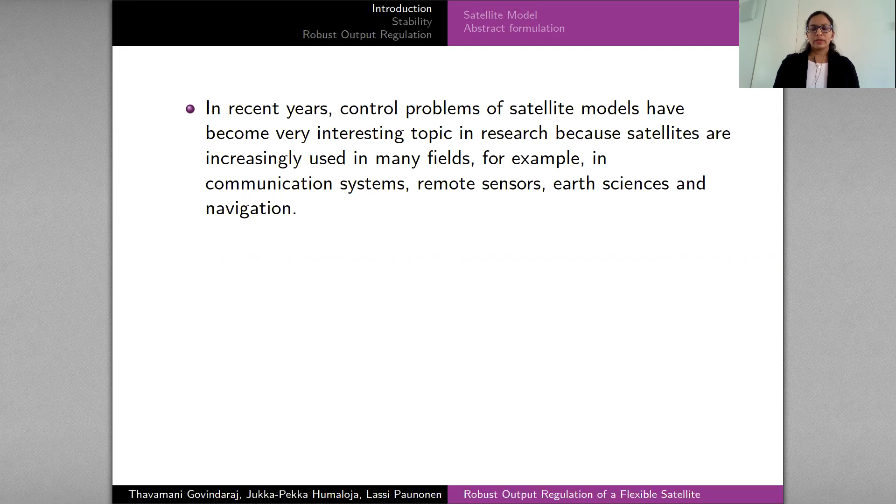There are a number of satellites modeled as two symmetrical flexible solar panels attached to a central rigid body. However, the flexibility of those panels affects the model dynamics, such as shape deformation, which leads to challenges in controlling those kinds of models.

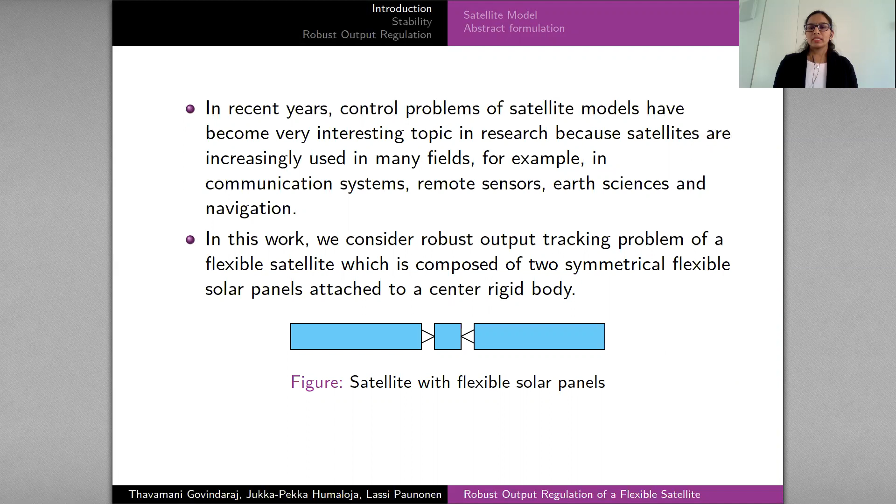In this work, we consider the robust output tracking problem of a flexible satellite, which is composed of two symmetrical flexible solar panels attached to a central rigid body. Our goal is to construct a controller in such a way that the output of the satellite model converges to a given reference signal despite perturbations, uncertainties, and disturbances in the system.

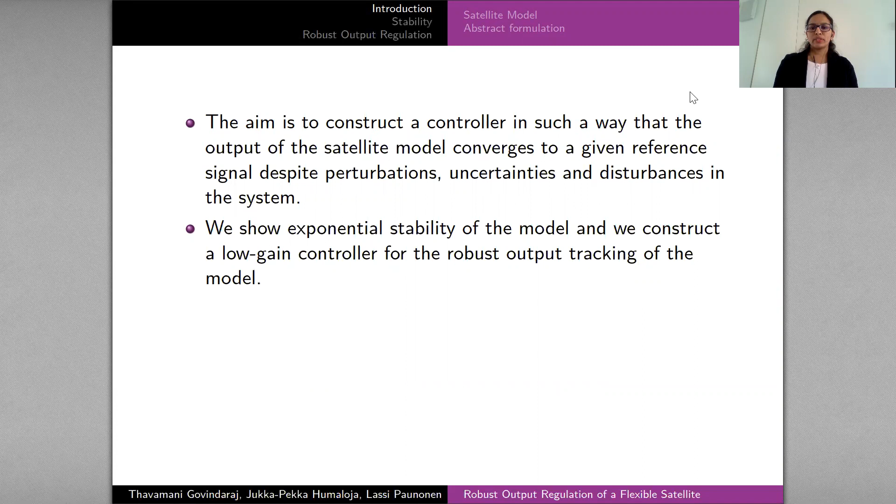We show the exponential stability of the model, and we construct a low-gain controller for the robust output tracking of the model. The main novelty of this work is that we use the Port-Hamiltonian framework, and we show a power-preserving interconnection between the panels and the central rigid body.

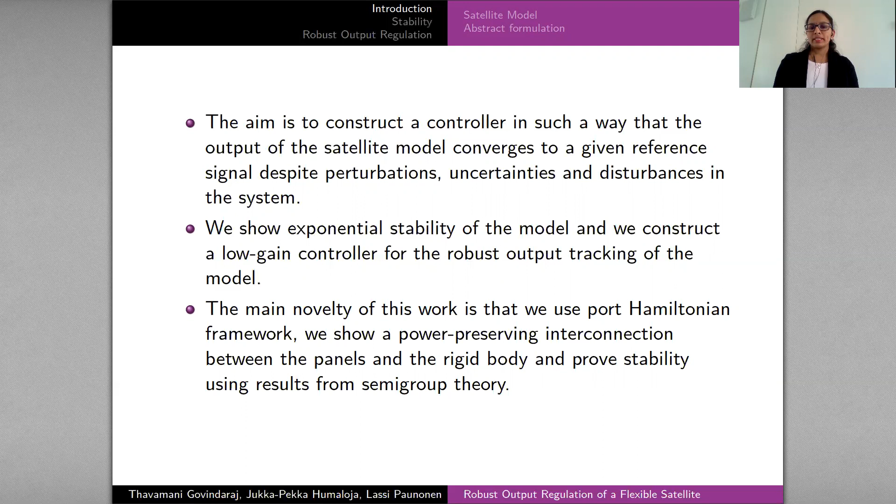We use the Port-Hamiltonian framework because Port-Hamiltonian systems have several nice properties, such that several interconnected Port-Hamiltonian systems via standard feedback interconnection is again a Port-Hamiltonian system, and the stability analysis of these kinds of systems becomes easier. For this stability analysis, we use results from semigroup theory.

So this is our model. We consider a dynamic model of a satellite composed of two symmetrical flexible solar panels and a central rigid body. This kind of model has been considered in Bontsema et al. and He and Ge. Here the solar panels are modeled as Euler-Bernoulli beams.

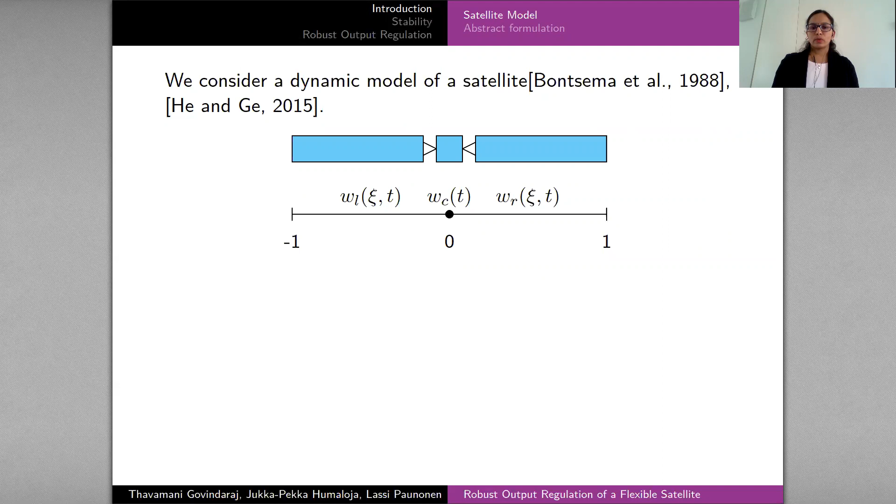In our model, we take the panels to be of length 1, so therefore the governing equations of motion are given by these equations. Here, WL, WR, and WC are the displacements of the left beam, right beam, and the central rigid body respectively. In these equations, E is the Young's modulus of elasticity, I is the second moment of area of cross section, rho is mass density, A is cross sectional area, and gamma is the viscous damping coefficient.

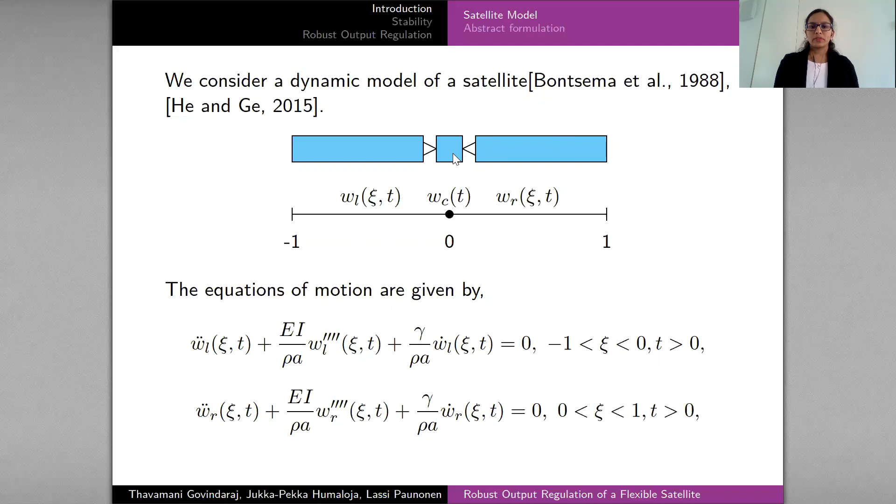For the boundary conditions, here we could see one of the ends of the beams is free, so therefore the shear force and the bending moment of the beams at these ends are 0, and the other ends are attached to the central rigid body, so therefore the boundary conditions are given by these equations.

Here these first two equations are for the rigid body. Here M and Im are the mass and mass moment of inertia of the central rigid body. These two equations are for the free ends, and at the center the linear and angular velocities of the left and right beams are equal, and they are equal to the linear and angular velocities of the central rigid body.

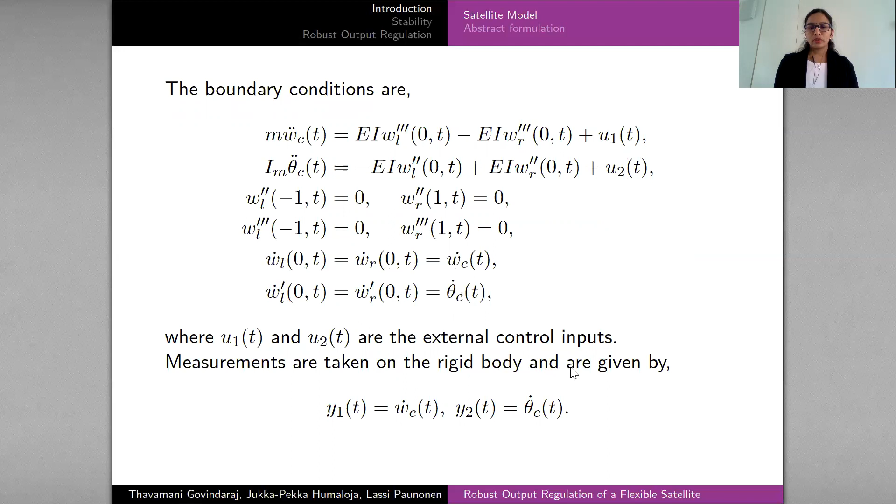Here U1 of t, U2 of t are the external control inputs which act on the rigid body. The measurements are taken on the rigid body and are given by the linear and angular velocities of the rigid body. So what is our goal? Our goal is to construct a controller in such a way that the outputs of the satellite model, that is the linear and angular velocities of the central rigid body, converge to given reference signals.

This means that the tracking error, which is the norm of the difference between the output of the satellite model and the reference signal, converges to zero asymptotically. And the controller is robust, meaning it is able to tolerate the disturbances, perturbations, and uncertainties in the system.

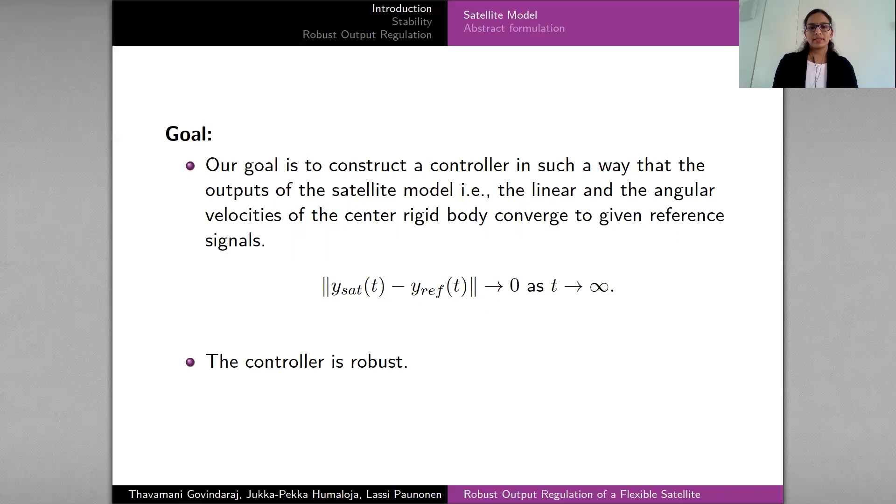As the first step, we formulate our satellite model in the abstract form. We can see the satellite model is indeed a coupled system of the beams and the central rigid body, where the beams interact with the rigid body through the boundary interconnection. So therefore, in our formulation, we separate the beam systems and the rigid body from the satellite model, and then we formulate the subsystems in the abstract form, and finally we couple the subsystems through the boundary interconnection.

We write the beam systems as boundary controlled Port Hamiltonian systems of order 2. First, we separate the left beam system from the satellite model. Since we are in the Port Hamiltonian framework, the state variables or energy variables are given by these terms, and therefore the left beam equation can be written by this equation.

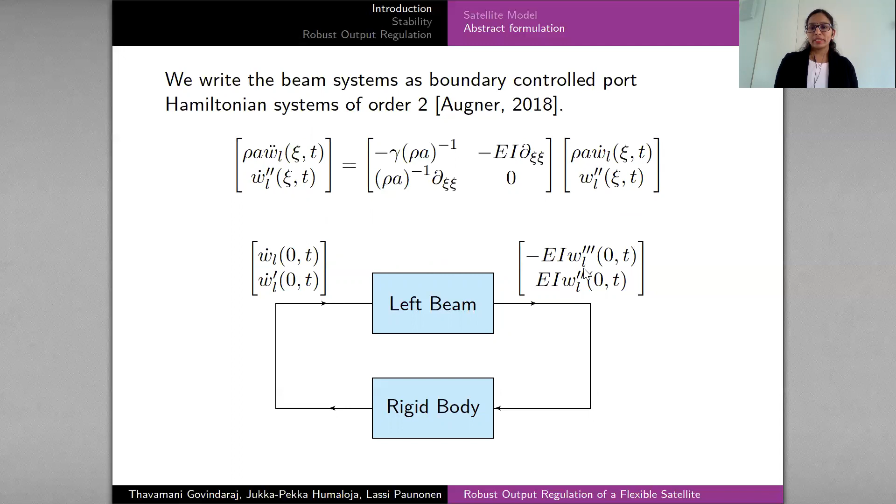For the boundary conditions, one end of the left beam is free and the other end is attached to the rigid body. At that end, the left beam has boundary inputs and boundary outputs given by these terms. That is, the boundary inputs are the velocity and angular velocities at the center, and the outputs are the shear force and bending moment at the center.

Similarly, for the right beam, we can write the right beam equation using the energy state variables given by these terms. One end of the right beam is free and at the other end it is attached to the rigid body. At that end, the right beam has boundary input and boundary output given by these terms.

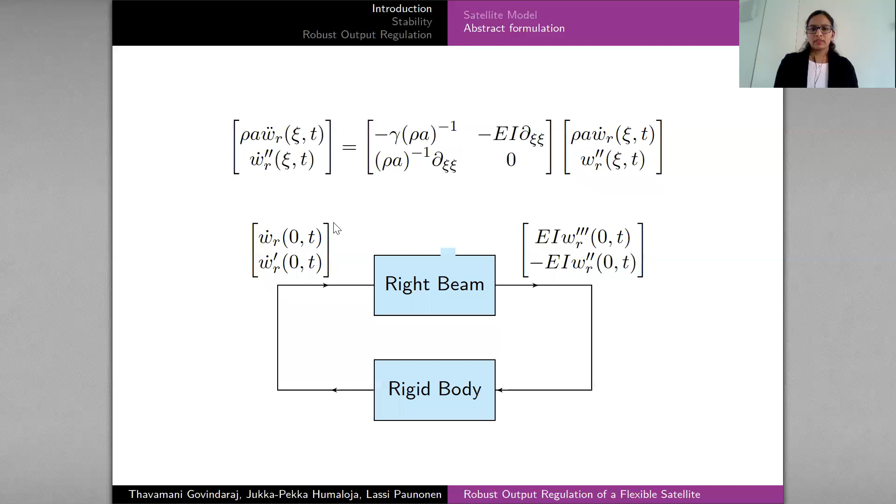Now we combine the two beam systems into a single system such that the input of the combined beam system is the average of inputs of the left and right beams, and the output of the combined beam system is the addition of the outputs of the left and right beams.

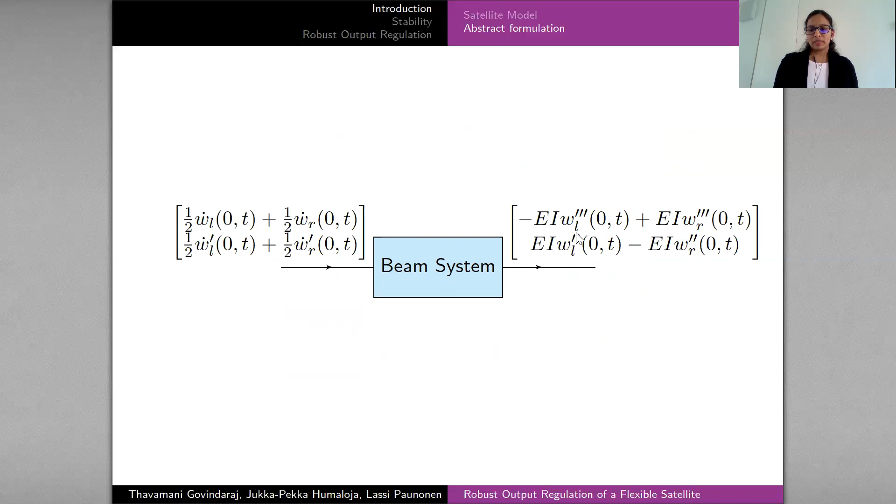Next, we separate the rigid body from the satellite model, and the rigid body equations are given by these equations. From these equations, we could see the rigid body actually doesn't have its own dynamics. These terms are from the beam system.

Therefore, the rigid body has inputs given by these terms, and we can measure the velocity and angular velocities from the rigid body. So the inputs and outputs of the rigid body are given by these terms, and we can write the rigid body in an abstract formulation using these inputs and outputs.

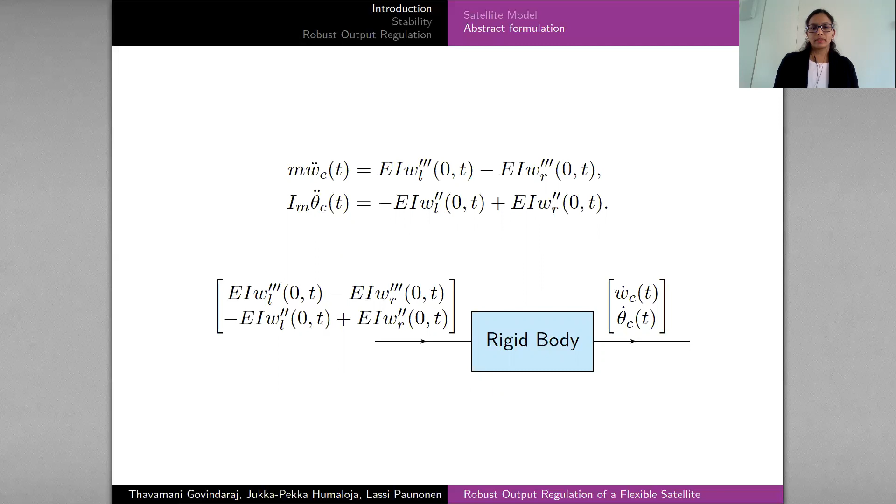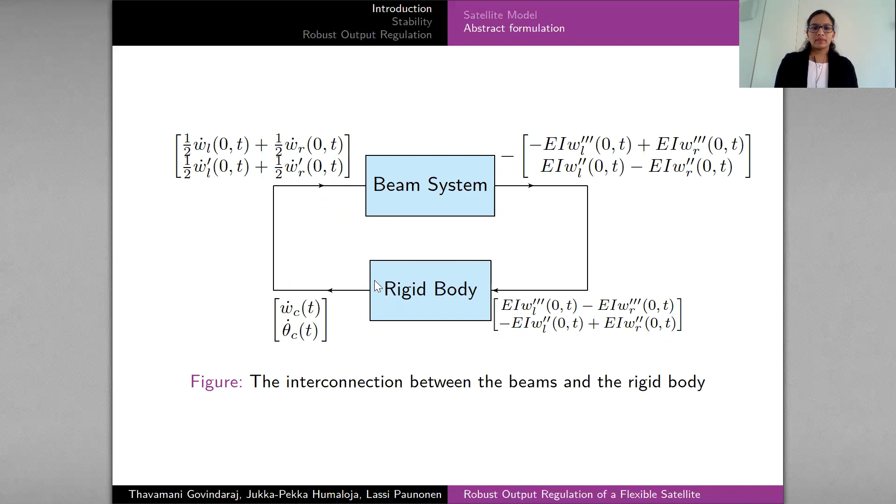Finally, we could see a power preserving interconnection between the beam system and the rigid body. That is, negative output of the beam system is the input for the rigid body, and input of the beam system is the output of the rigid body. So finally, we are able to write our satellite model as a coupled system of beams and the rigid body using a power preserving interconnection.

Next, we analyze the stability of the satellite model. First, we analyze the subsystems and then the coupled system. So first we analyze the rigid body. The rigid body equations are given by this equation without the interconnection.

We could see the eigenvalues of the rigid body are zeros. Therefore it is not asymptotically stable. So we stabilize the rigid body by negative output feedback so that it is exponentially stable.

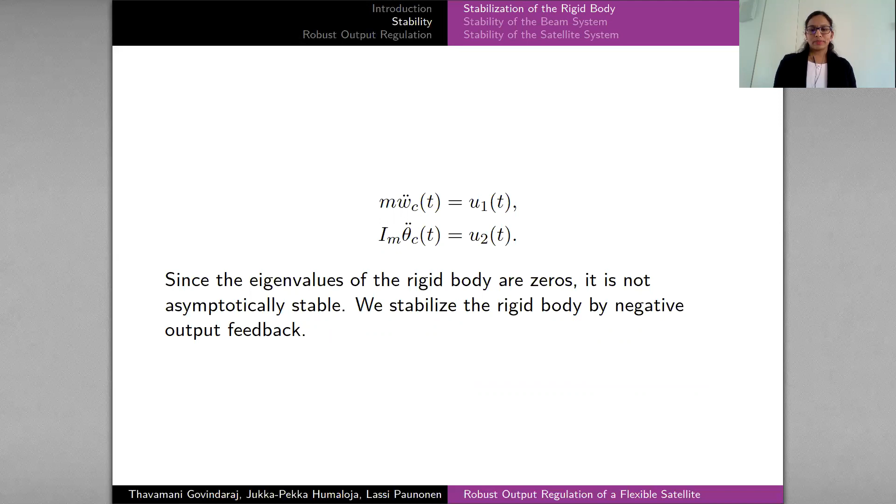And then we consider the beam system. The beam system is actually the combined system of the left beam and the right beam.

The beams are symmetrical, so if we analyze the one beam system, the same is true for the other beam. So we analyze the left beam system, which is exponentially stable. Here we give an outline of the proof.

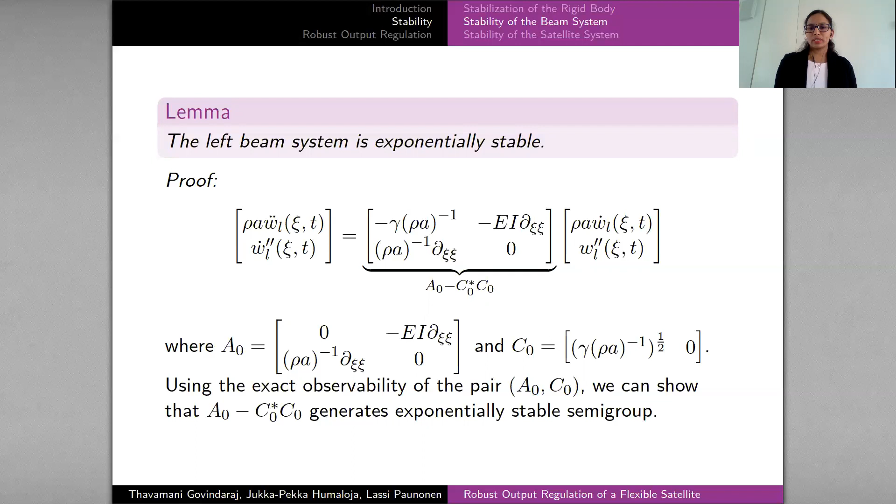Next, we consider the satellite system. The satellite system is exponentially stable. Here also we give an outline of the proof. We use the Gearhart-Prüss-Greiner theorem, which says that a semigroup is exponentially stable on a Hilbert space if and only if the spectrum of the generator lies in the complex left half plane and the resolvent of the generator is uniformly bounded on the imaginary axis.

In our case, for our satellite model, it is easy to see that the beam system and the central rigid body are impedance passive systems. So, using the impedance passivity, it is easy to see that the satellite operator generates a contraction semigroup, and therefore the spectrum lies in the complex left half plane.

We have already shown that the beam system and the central rigid body are exponentially stable. So, using the stability of the subsystems and the power preserving interconnection between the panels and the rigid body, it is easy to prove that the resolvent of the generator is uniformly bounded on the imaginary axis. Therefore, the satellite system is exponentially stable.

Finally, we consider the robust output regulation problem for the satellite model. Our goal is for the linear and angular velocities of the central rigid body to converge to given reference signals. We track sinusoidal signals of the form given by these equations, where omegas are known frequencies and the coefficients AK and BK are unknown.

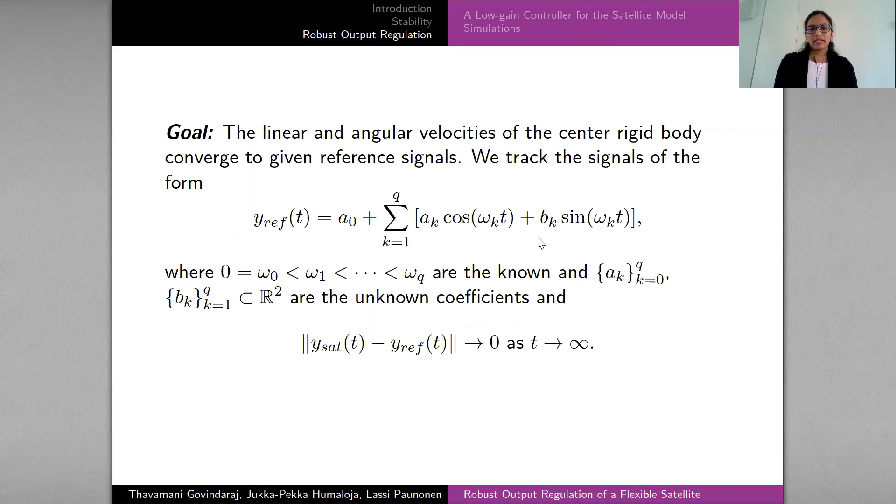The tracking error converges to 0 as t tends to infinity. Therefore, we construct a dynamic error feedback controller of the form given by these equations. Here, calligraphic G1, calligraphic G2, and K are the controller parameters, chosen such that the closed loop system containing the system and the controller is exponentially stable. The tracking error converges to 0, and if the system admits perturbations, uncertainties, and disturbances, tracking is still achieved.

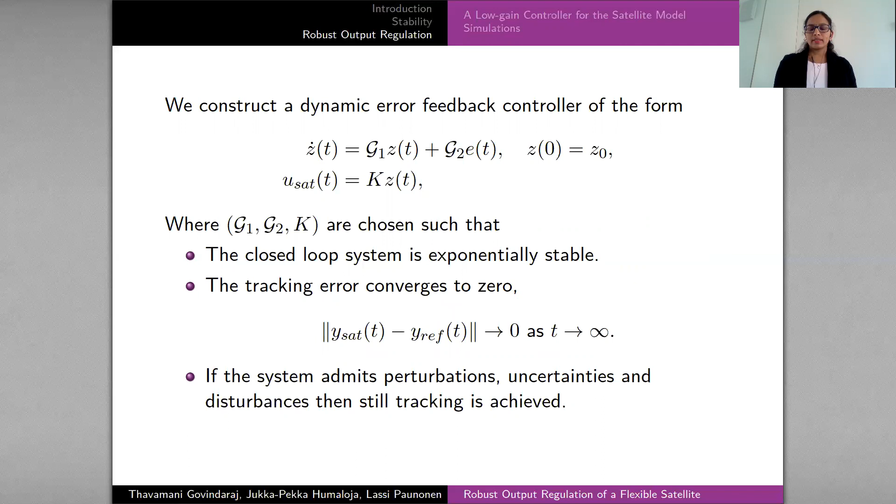Since our model is exponentially stable, we can use the theories from Rebarber and Weiss to construct a simple low-gain controller for the satellite model. We track a particular reference signal of the form shown here: the linear velocity tracks a constant signal, and the angular velocity tracks this combination of cosine and sine.

The frequencies from the reference signal are given by 0, pi, and 2 pi. So the controller parameters are given by these terms. Here, G1 contains a copy of the frequencies from the reference signal, and Psat is the transfer function of the satellite system. Epsilon is the tuning parameter, to be chosen sufficiently small such that the closed loop system is exponentially stable.

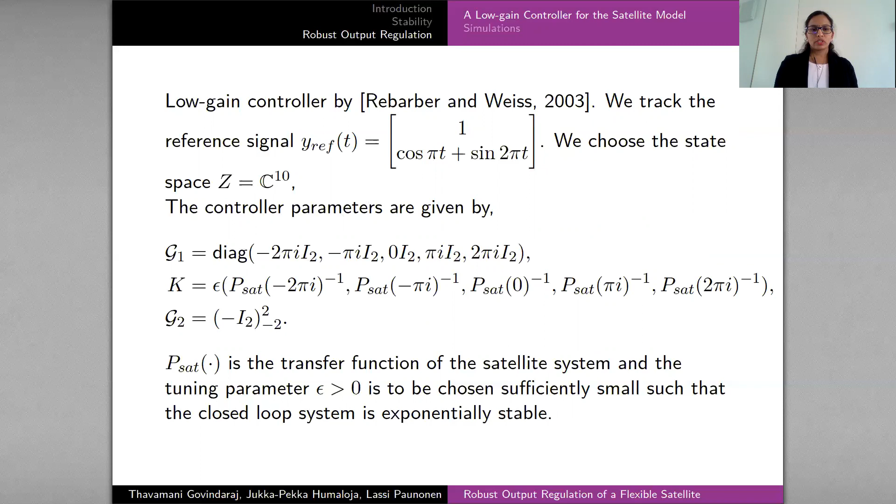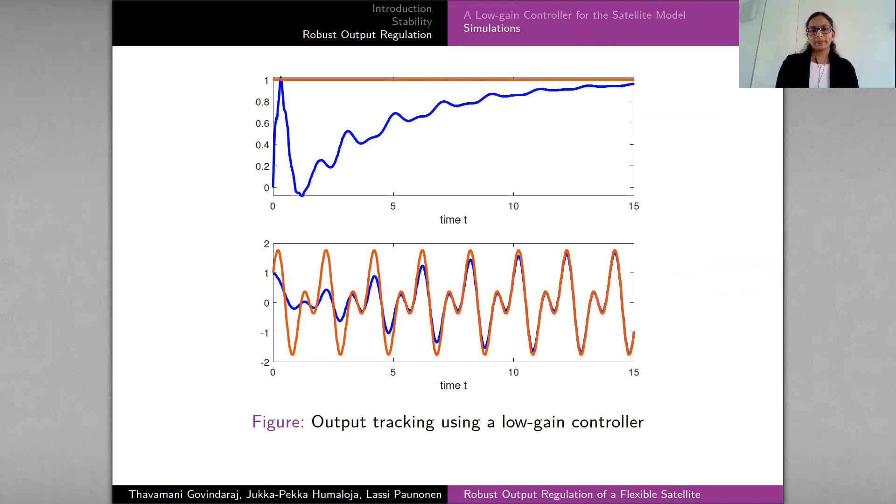We have run some simulations in MATLAB. Here the blue lines are the outputs of the satellite model and the red ones are the reference signals. We could see the tracking is achieved for the satellite model, and also the regulation error, that is the tracking error, converges to 0 asymptotically.

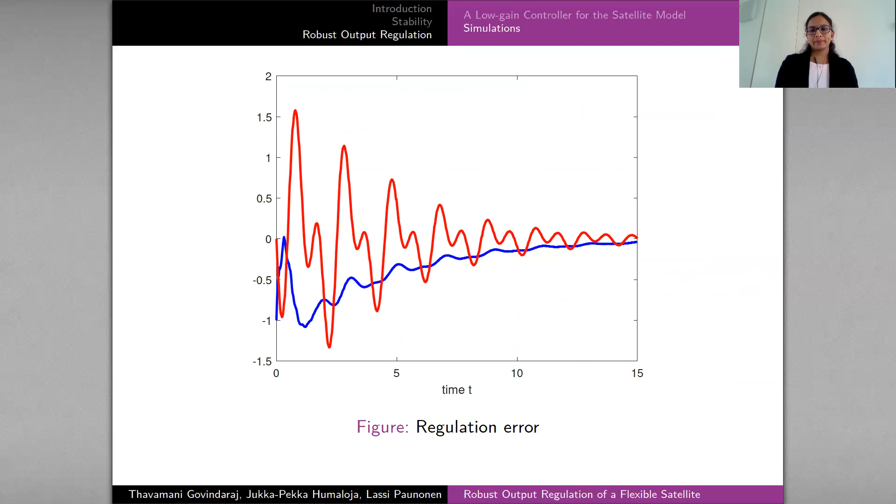We conclude our talk by saying that we considered a PDE-ODE model of a flexible satellite composed of two symmetrical flexible solar panels and a central rigid body. We showed that the model is exponentially stable, and finally we constructed a simple low-gain controller for robust output regulation of the model, with simulation results testing the effectiveness of the controller shown.